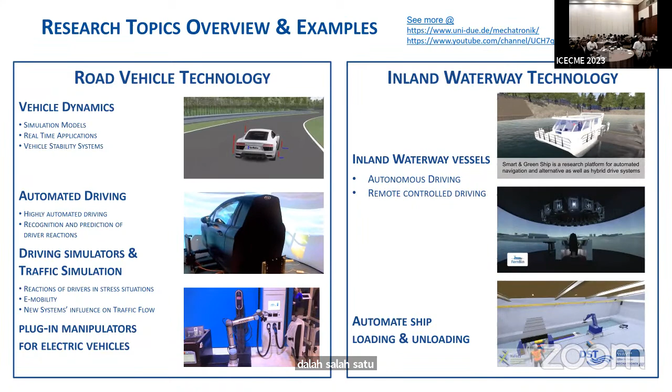On the left-hand side, the activities in the field of motor vehicles, starting with vehicle dynamics systems. This was later on supplemented by the development and installation of dynamic driving simulators, but also by the establishment and use of models to simulate traffic flows with many thousand objects. In addition, we also researched methods for robot-assisted automatic charging stations for electric vehicles.

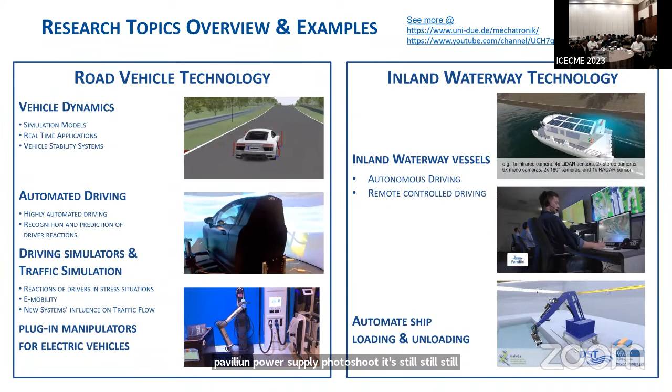The right-hand side of the slide shows the activities in inland vessel automation, accompanied by the automation of loading processes in ports and new types of berths that are not necessarily part of a conventional port. At first glance, these two sides of the slide appear to show very different areas, but there are many similarities, as we will see in a few minutes.

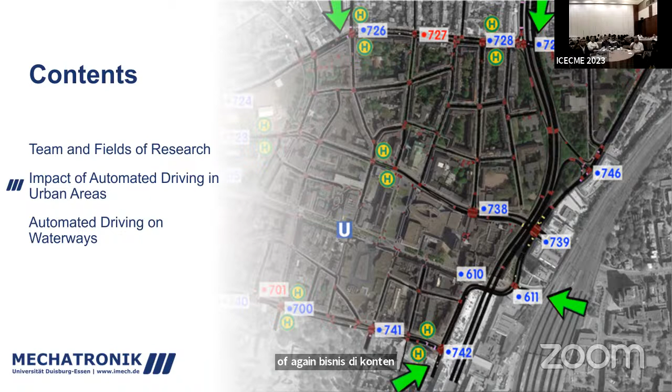I have just said that we are not only dealing with the simulation of the vehicles themselves, but also with the traffic flow that results when a large number of vehicles are moving on roads. This is the content of the next section, and therefore I would like to look into another research question very rapidly: how does automated driving affect traffic flow?

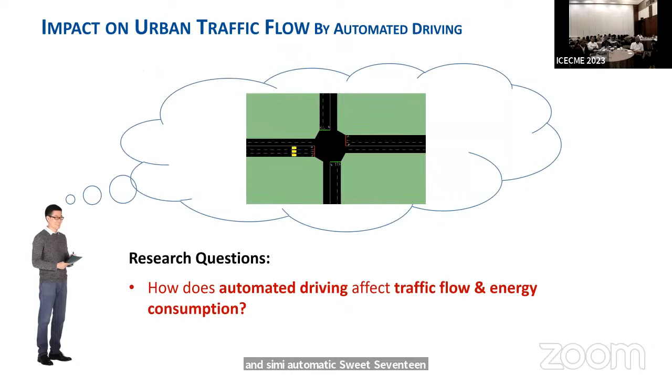When considering the automation of motor vehicles, there is a standard categorization that has been established for many years, which is presented here. A total of 6 levels are distinguished. Level 0 describes vehicles without any driver assistance. Level 1 only provides assistance, and level 2 corresponds to partially automated driving. This is the state of the art in legislation in many countries of the world.

The highest development stage is level 5, in which a driver is no longer required. In particular, a steering wheel and a gas pedal are no longer required. This level is not approved worldwide on public roads. I would like to limit myself here to the difference between level 0 and 5. There are a number of other studies on this at our chair, which you can find easily on our website.

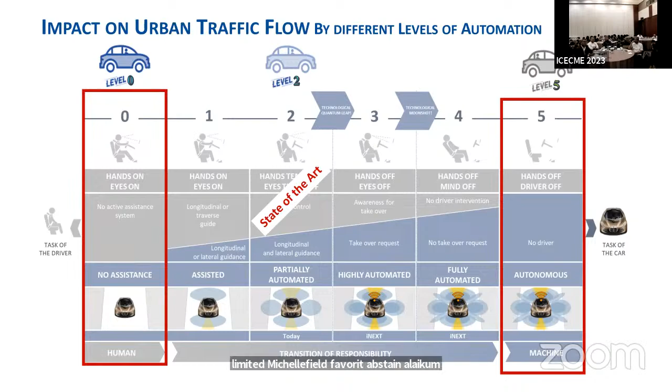We are very much interested in the influence of automation on traffic flow in urban areas. In this context, a traffic flow model of the city of Duisburg with around 500,000 inhabitants was created. We did similar research with Chinese colleagues in Wuhan. It covers several hundred streets and can be simulated with tens of thousands of vehicles.

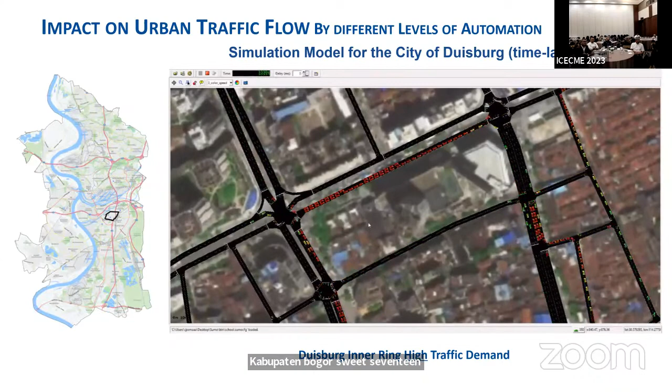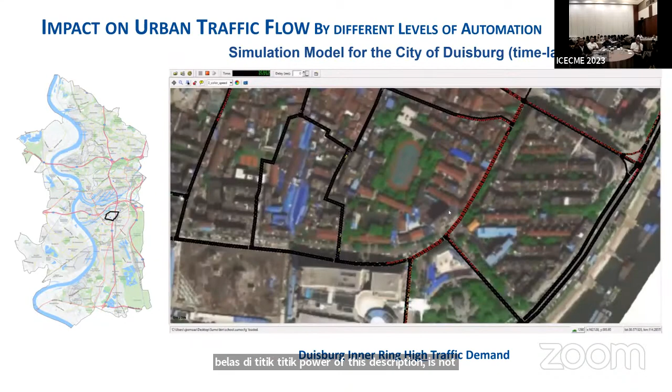We used a microscopic traffic flow simulation model that allows the vehicles to be individually equipped. This means that we can distinguish in particular between vehicles that are driven by human drivers and those that drive automatically. The difficult part of this description is not the highly automated driving, but the simulation of the human driver. This is part of a doctoral thesis in which driver models based on artificial intelligence were developed as part of extensive test subject studies.

Here again, I can only give one example of a result, maybe a second one on the next slide.

In this case, we simulated an area of the city of Duisburg where we assumed the traffic demand would be 50% higher than at normal times—early in the morning and in the evening during rush hour. In total, over 30,000 vehicles were simulated in real time, and the model validation was fed with 76 induction loops.

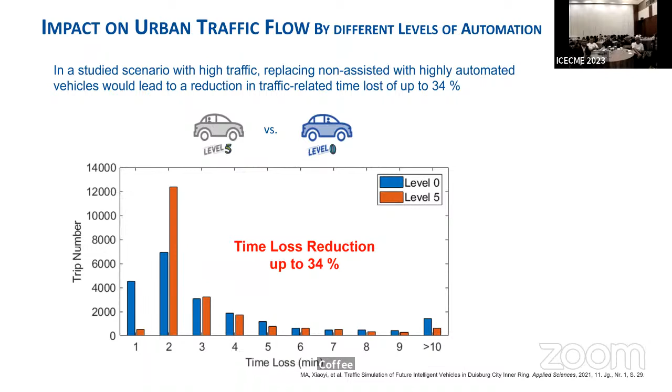As I already said, there are no level 5 vehicles in use today, at least not on public areas. However, there are some exceptions. In test fields, it is possible to have vehicles drive fully automatically, and there are a number of systems for this. One of these systems that we are currently investigating scientifically is the so-called FLAIT system, which is being presented here.

And the question is whether there is a way, another path to autonomous driving other than expensive conversion of conventional motor vehicles.

The next question is: is there a meaningful, affordable, and individualized complement to public transportation? So maybe, for instance, replacing trams and coaches and so on.

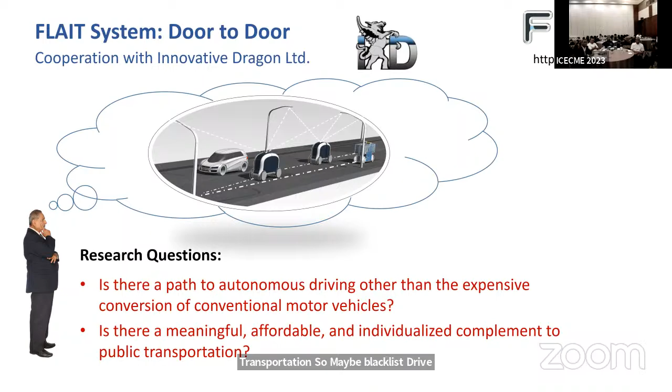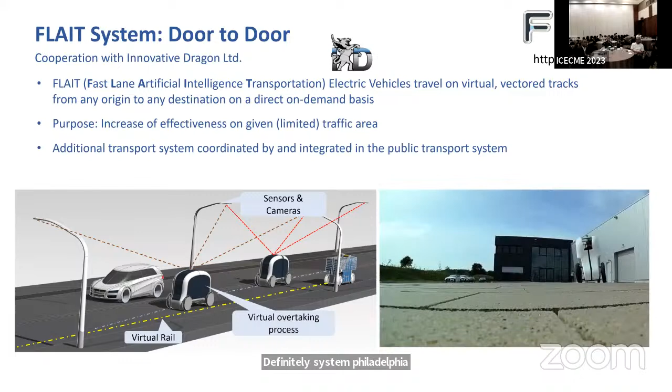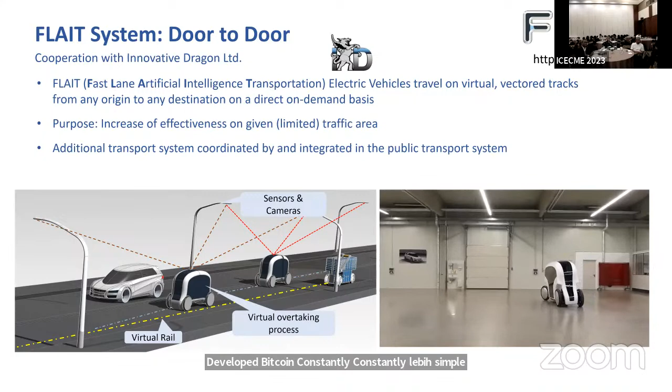The principle of the FLAIT system, which has been developed during the last year, is that it works with so-called virtual rails, which can be conductor loops laid in the road, but also can simply be painted lines applied to the road surface. The idea behind this FLAIT vehicle is to make much better use of existing road layout and road space than is the case today.

An important aspect is that, unlike other solutions, expensive sensor technology is not installed in the vehicles, but in the surrounding infrastructure. This leads to significantly lower costs overall.

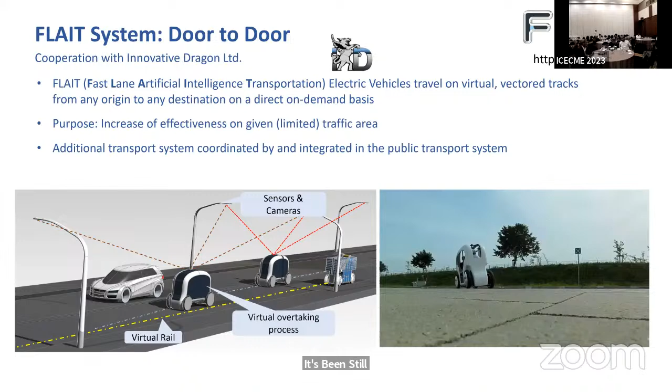At the moment, there is not yet a fleet deployment of these vehicles, which means we are still working on a scientific basis for how such a vehicle can be meaningfully integrated into today's road traffic.

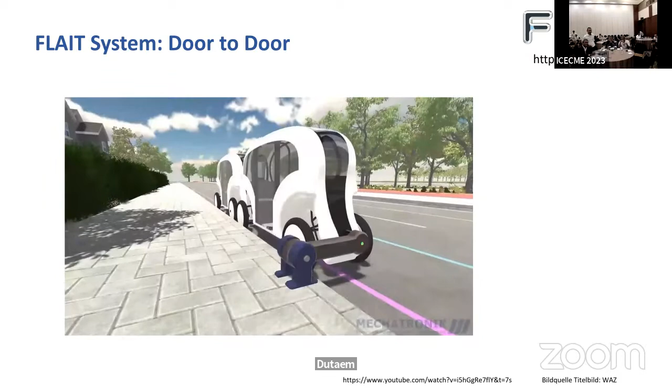To demonstrate what such traffic could look like, we have examined the planned construction of our new faculty campus on a site outside the city. This faculty campus is planned for 2030 or 2035.

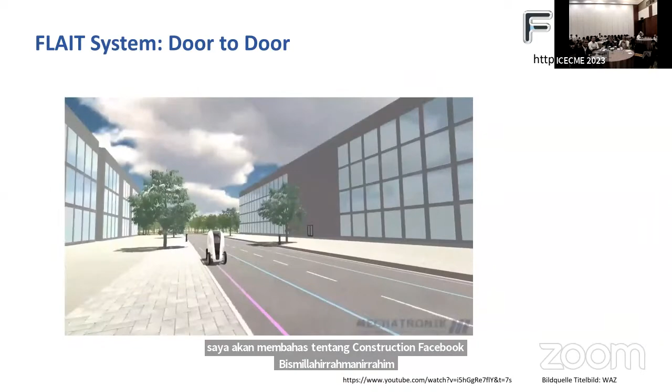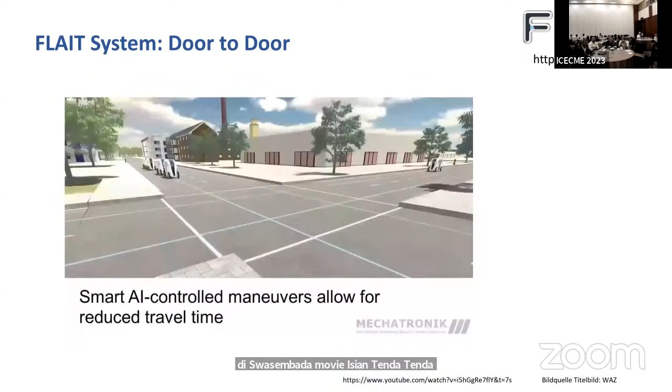This virtual movie is intended to illustrate this, and the whole thing is currently a simulation. This means that this system and this operation with these vehicles has not yet been realized. However, we hope that we will be able to realize it in this area or in other areas in the future.

So the next research questions I would like to present briefly. We have a group of people who worked on robotics, and Dr. Kurniawan was part of this team many years ago.

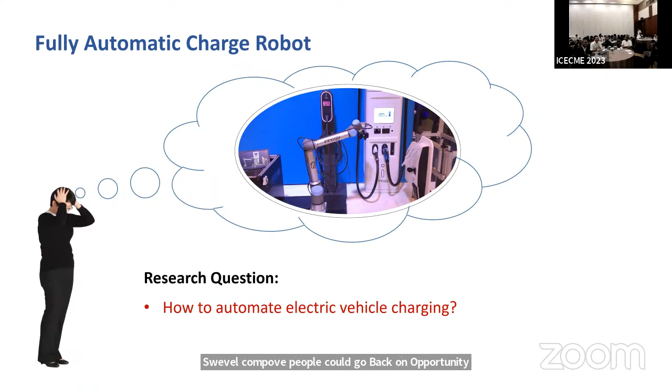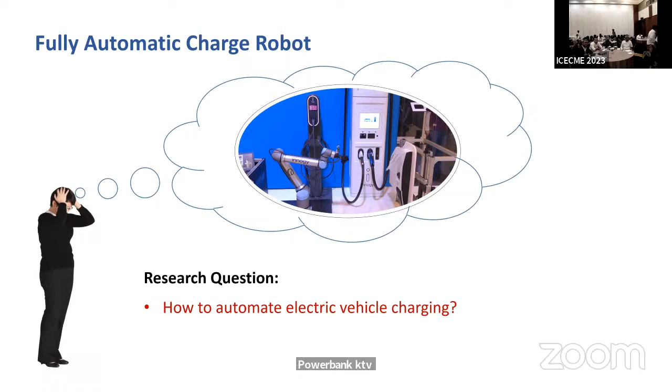We are also looking at how to use robots to automate the electric charging of electric vehicles. We have been investigating this question together with an industrial partner for several years now, and we presented the results to the public a few years ago at the famous International Motor Show in Munich. On this slide, you can see the system.

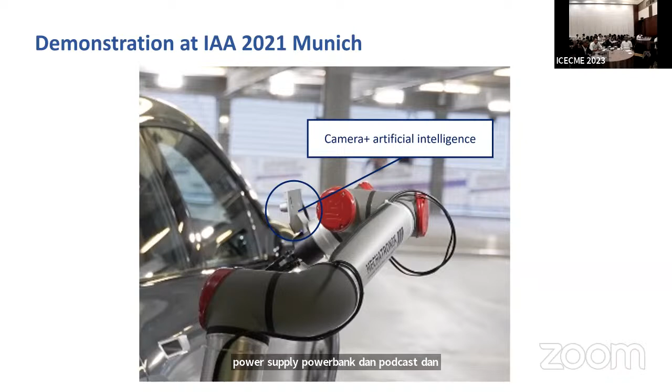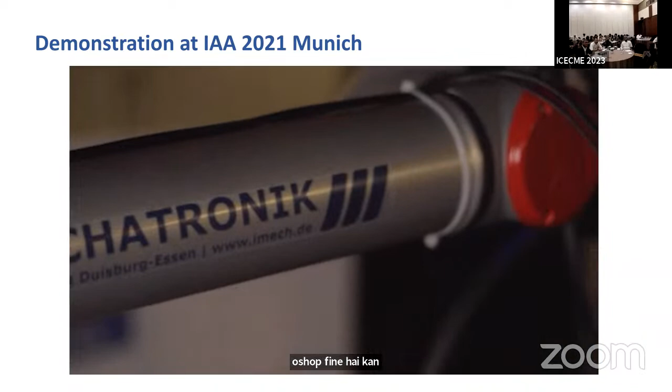It consists basically of a robot, a so-called cooperative robot, which can be bought on the market at the moment. What we did is add some cameras, some more sensors, and a lot of artificial intelligence in order to automatically find the charging flap, which can be opened automatically. The system is also able to remove the plug from the charging station and insert it into the vehicle.

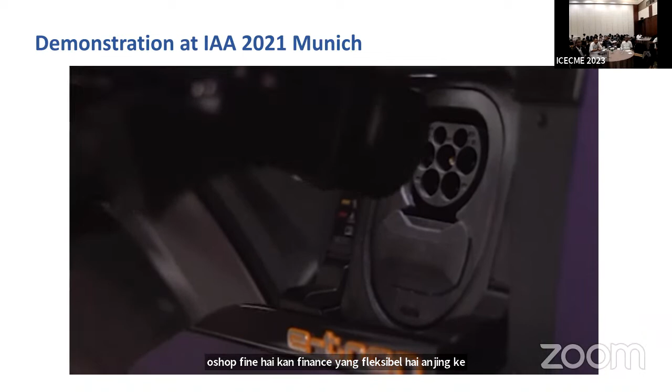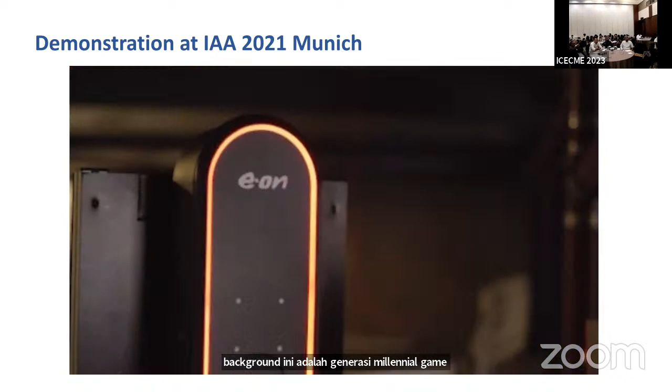This is only intended to give a brief impression of the topics that can be scientifically investigated in addition to the narrower field of electromobility. It has always been important to us that these scientific results also provide impetus for applications that can then be used industrially.

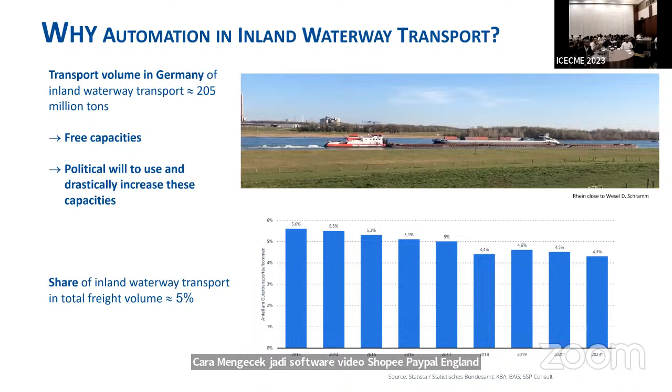Because today we have these vessels, and normally there is not a big problem with them. But the reason for that is that the freight volume in Germany and other countries currently accounts for around 5% of the total freight volume, which corresponds to 205 million tons of freight per year. This short video shows two typical inland vessels on the River Rhine in Germany, and unfortunately, the proportion of freight volume on inland vessels has decreased during recent years. There are a number of reasons for that.

So the number of 5% doesn't sound like much at first, but putting this in relation to transport by rail or road shows that transportation by water has considerable potential.

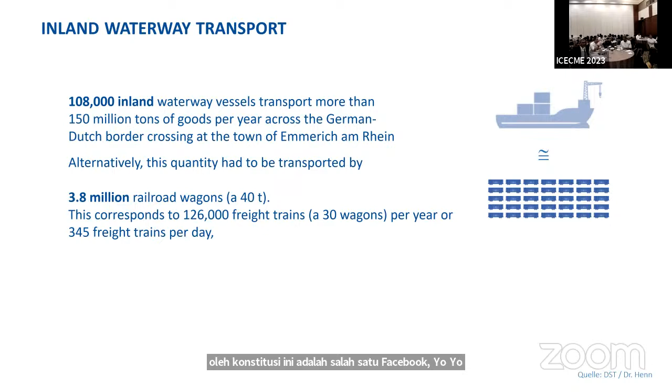If we would like to transport these goods by train, we would need 3.8 million railroad wagons. This corresponds to 126,000 freight trains per year, which means 345 freight trains per day. If you do that by truck, we don't need to talk about that, but it will end in a 300 kilometer long truck convoy per day. So this makes not much sense.

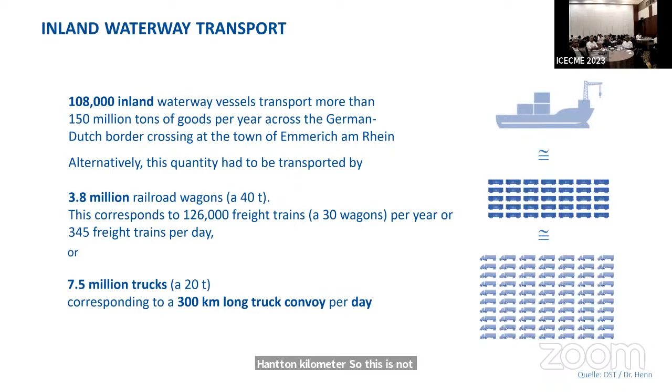And this is exactly the reason why we also try to apply the experience we have from the automotive business to waterways. Waterway transport is environmentally friendly, and it has a lot of free, unexploited freight capacity. But we have a lack of qualified new crew members for ships, and also there is a high age of currently deployed vessels. So we need retrofit solutions as well.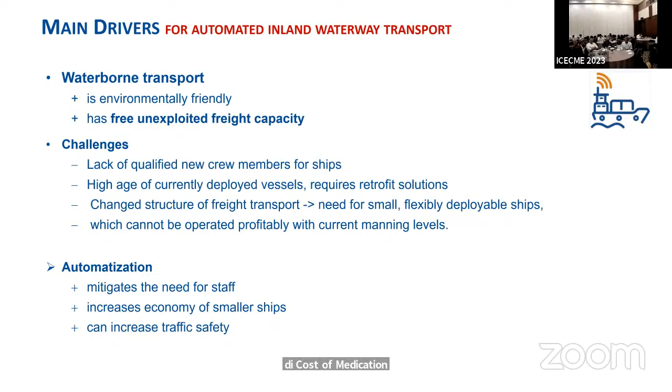The solution to meet these challenges is automatization, because automatization mitigates the need for staff. It increases economy of smaller ships, which we will need in the future, and it can increase traffic safety.

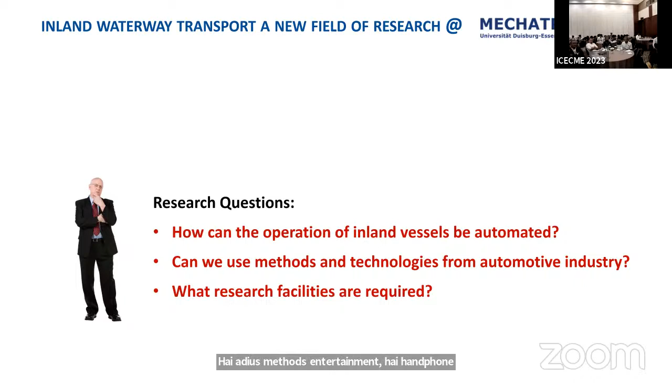The question now is, how can the operation of inland vessels be automated? Can we use methods and technology from the automotive industry? And what research facilities are required to do that?

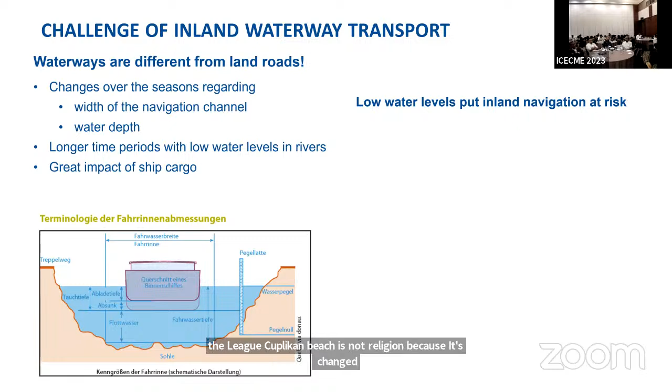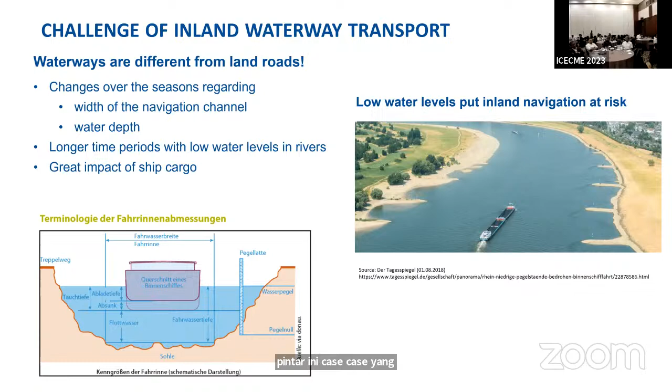On the right, we see the River Rhine, for instance, during a period of extreme drought. In this case, the water depth is significantly less than in other seasons.

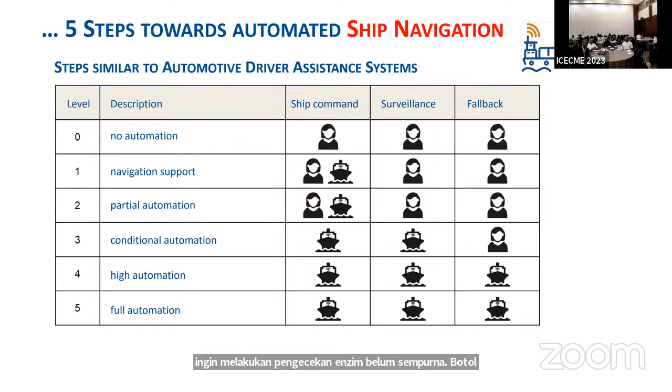Now the question arises, how can we transport our experience from automotive science to waterways? Similar to motor vehicles, automation categories have also been defined for this sector. The state of the art is comparable to the automation of road vehicles. Partial automation, according to level 2 in automotive, is already available and approved. Of interest for our research, other than in automotive, is to bring level 5 onto the road, meaning in this case onto the inland waterway. So we work on full automation, and as a special case, the remote control of ships.

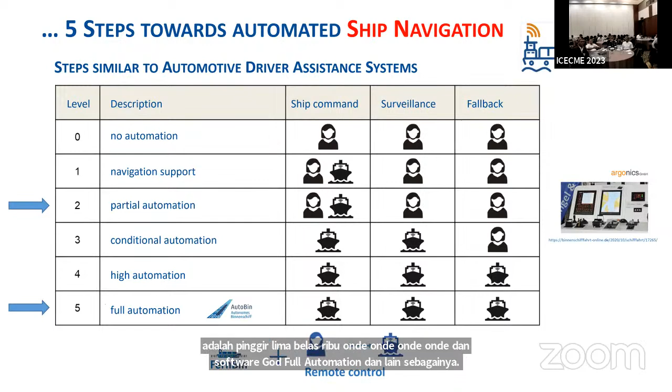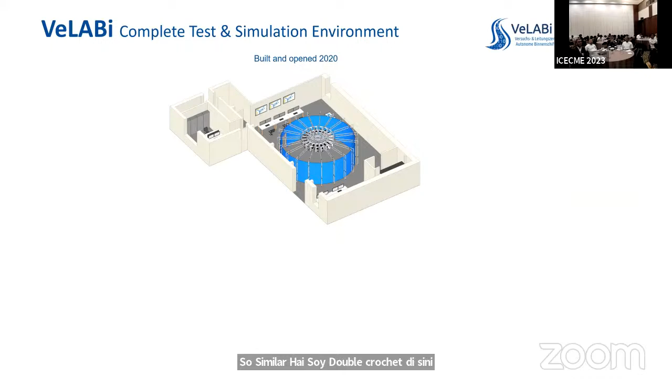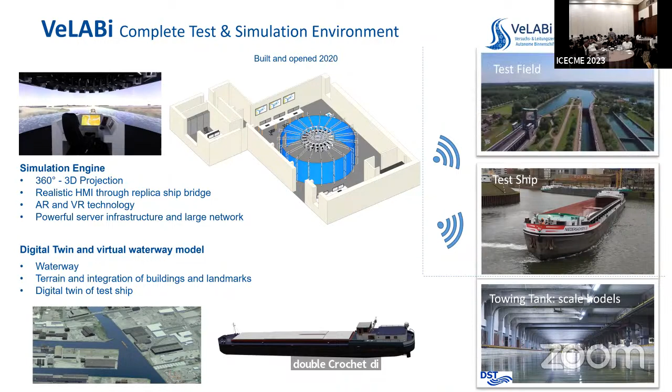The digital twin is key to doing all this research, and we developed a digital twin which is simulated in real time, based on a simplified flow model that nevertheless represents reality accurately enough. You can see this on the right side: a simulation of a typical inland waterway vessel with high waves, of course.

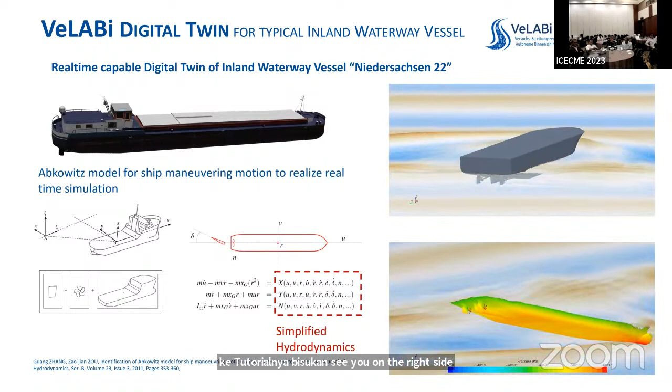One of the first projects we did was Autobin, about autonomous inland waterway vessels, where the ship guidance from start to destination should be fully automatic. This means we need a self-driving system without any human intervention. Collision avoidance, of course, is key with other waterway users, shores and objects, and it should comply with all given inland vessel traffic rules in order to get approved by legislation.

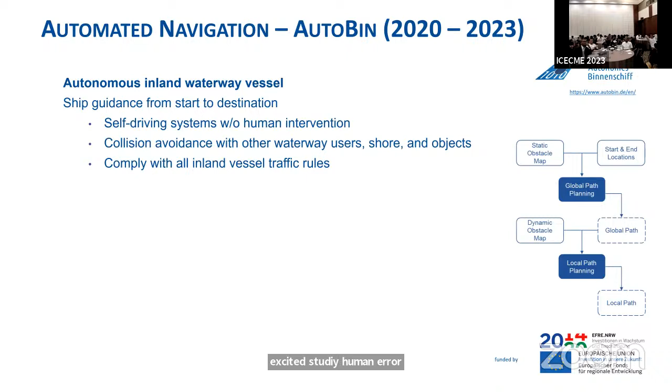So we want to reduce control tasks for the crew, meaning also reduce personnel costs, prevent accidents due to human error, increase safety levels, and the final target is fully driverless operation. We use a lot of knowledge from autonomous road driving because the basic tasks are independent of the system, and autonomous driving methods and sensor concepts can be adapted.

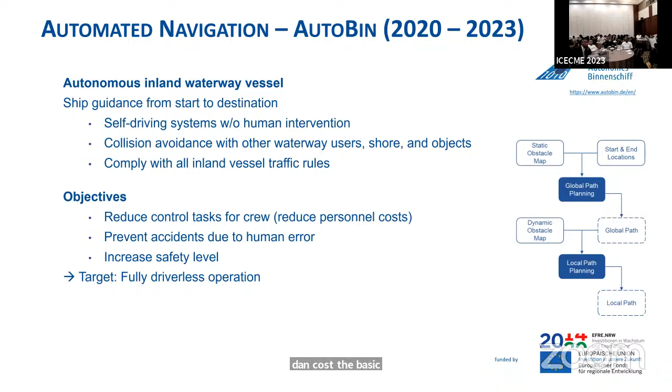This is shown on this slide, and all these sensors you can see here are also in use in high-equipped cars, for instance Mercedes cars and others. So we talk about LiDAR, mono and stereo cameras, GPS, radar, and so on. It's very similar.

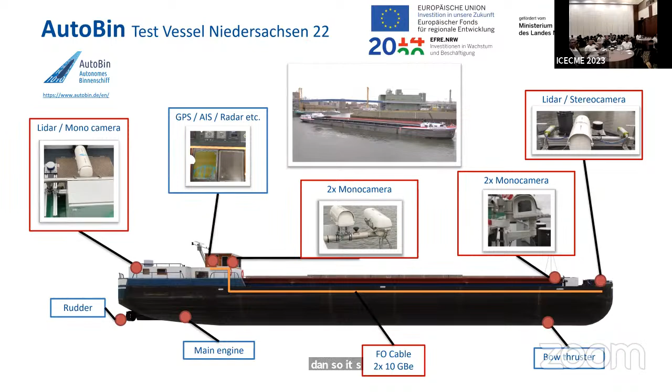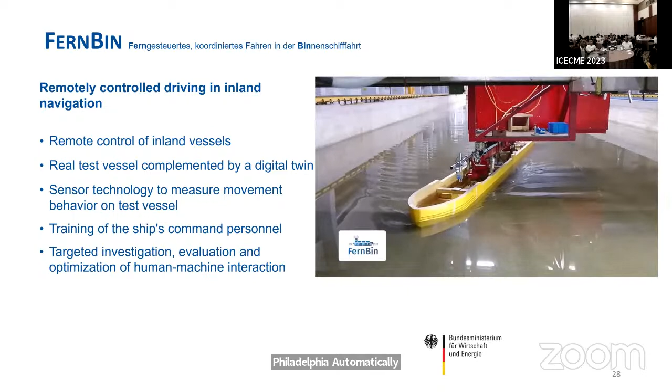On the way to autonomous driving, we also talk about remotely controlled driving in inland vessels, shown in this short video. We talk about remote control of inland vessels, and we have a real test vessel complemented by a digital twin. You just saw these test vessels going to the water.

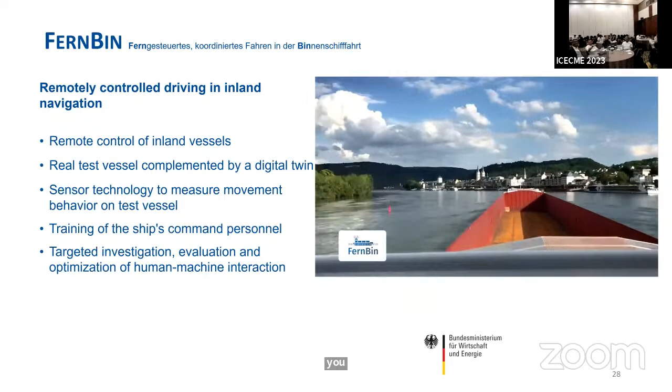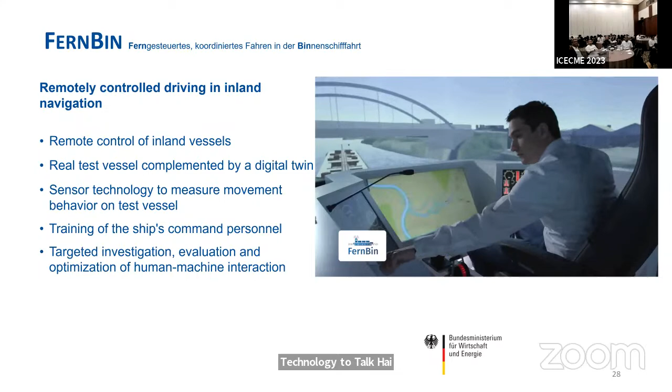Sensor technology to measure movement behavior on the test vessel was installed. We also did some training of the ship's command personnel, and the targeted investigation, evaluation, and optimization of human-machine interaction was done in cooperation with our staff.

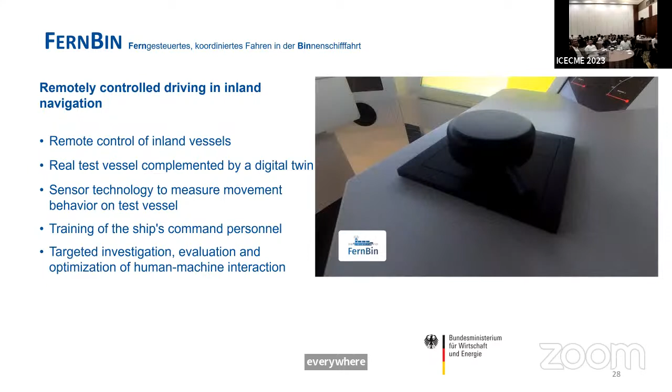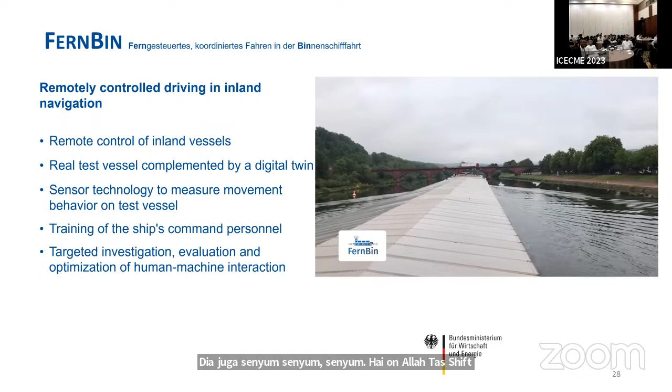Here you can see a real view in the real world on our test ship. And I can say it worked very well.

And the next and last step - along with the automation of ship operation, it also makes a lot of sense to automate the loading of inland vessels, as is already the case in large overseas ports. But this is not yet the case for inland vessels. So new approaches are being pursued to enable the automated operation of small ports on inland waterways.

For this reason, we started to set up a test center a few years ago for innovative port and cargo handling technologies. This center opened a few months ago. It offers a range of innovative development opportunities, including a test hall for fully automated port operation at a scale of 1 to 16 - so it's a rather small building.

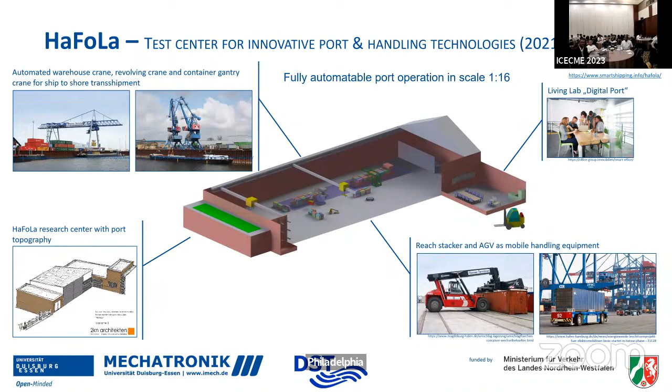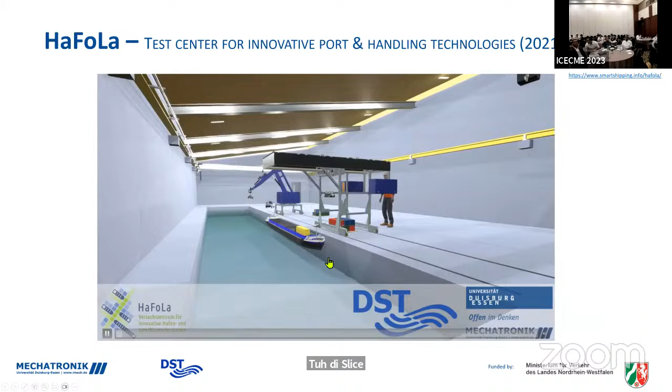This slide shows a virtual insight into the operation of the port research laboratory. The real laboratory was opened and presented to the public a few months ago.

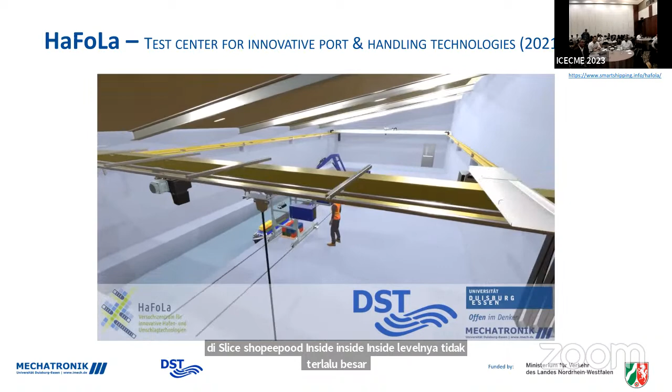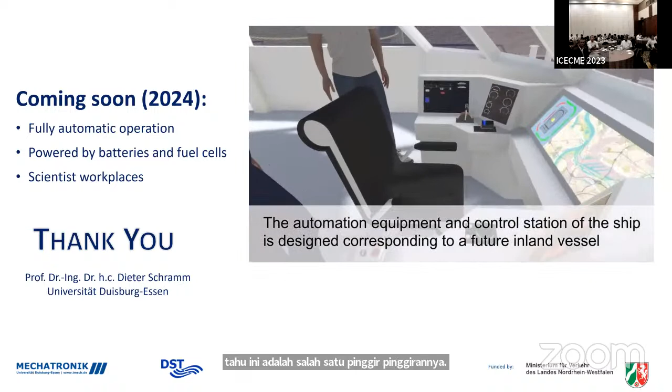Okay, so this is more or less it for this presentation, and I think I kept the time more or less. I would like to conclude with a look at our research vessel that has just been designed and ordered together with our partners. This ship can navigate automatically and will be electrically powered by batteries and also by fuel cells. It will also provide workplaces for at least 7 researchers.

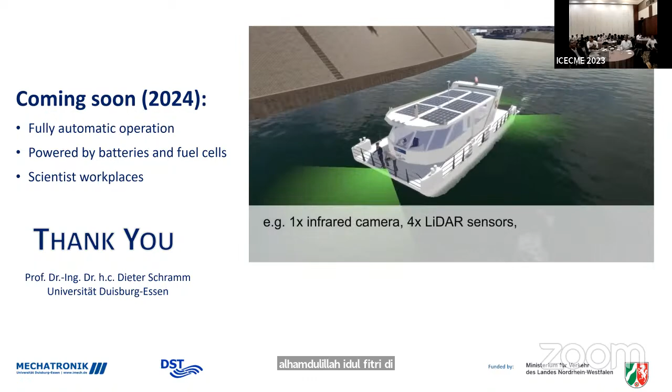At the end of this presentation, I would like to thank you for your attention. And if there are any questions, I will be glad to answer them.